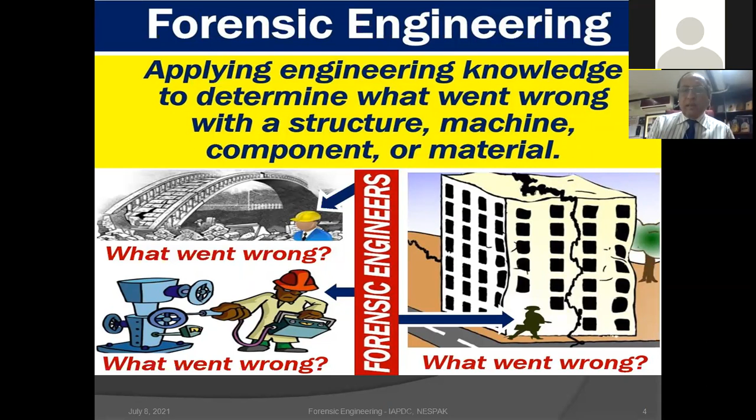Now you see in this figure, different kinds of works or structures. They could be civil, mechanical, or any other engineering - a material, a machine, or a component of any type. Forensic engineering is the activity to find out what went wrong and how did it go wrong. Sometimes what to do to make it correct is also included in the scope of forensic engineering in some cases, but generally it is an investigative process, the reverse process.

Here you see collapse of a structure. So the study of damaged structures or damaged works - but the study will involve many engineering principles, like even sophisticated modeling or some analysis or calculations. They will be a part of this. It's not only the engineering analysis which will be done to investigate failure, but also the inspection of site, the conditions of the site.

The collection of evidences at the site, in addition to the analysis which will be done in the end. Maybe some investigative studies, some laboratory testing would be needed, and ultimately the results are compiled in the form of a report called an evaluation report, which may be submitted to the court of law.

So in terms of its etymology, as per dictionary, forensic means the use of science and technology in the investigation and establishment of facts or evidences in a court of law. These are the clear-cut meanings of the word forensic. It is derived from a Latin term forensis, meaning public.

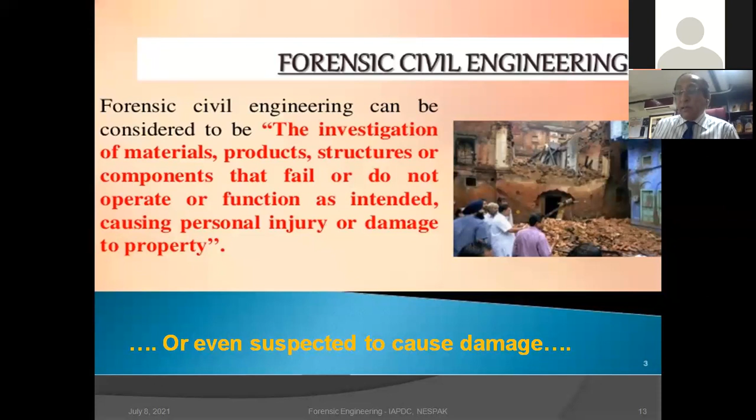Here, the investigation of materials, products, structures, components, machinery, all types of failures which are not performing their purpose. Either they have failed in totality or their intended purpose is not being fulfilled. They will fall in the domain of forensic engineering. Even suspected cases in which some doubt is there that the performance may be affected, there could be something flawed in the design or in the construction. So if some forensic study has to be carried out, sometimes referred to as forensic audit, that will also be a part of forensic engineering.

Now let's have the broad definition of forensic engineering, that we are dealing with damaged or deteriorated works. It is different from design, in which we start designing and planning and then ultimately end up in a design. Here, a structure which has been designed and constructed, it's the reverse way, in which we have to go to site to make inspection, to make observations, to maybe make some measurements, to collect evidences, to talk to people who have seen it happening, and then probably carry out some engineering testing, maybe some field testing, maybe some laboratory testing as per requirement, to find out ultimately the reasons for the damage or deterioration, how it happened, why it happened, whatever has happened.

So it is like a detective. In many cases, the forensic engineer is hired also as an expert witness by many organizations, by many clients, so that they can, in their technical language, present the matter in the court of law.

Here, I would like to explain a few terms which are required for clarity in this area of work. One is the accident: it is a hazard that exists, but the person or people are not aware that it is there. So that all of a sudden may happen, so that becomes an accident about which there is no awareness, but there is a hidden danger present, about which the people have closed their eyes probably. Whereas on the other hand, the failure is an explicit indication of whatever wrong has happened. And this is sometimes called an unacceptable difference between what we designed and what we observed, between what was expected and what actually the performance is.

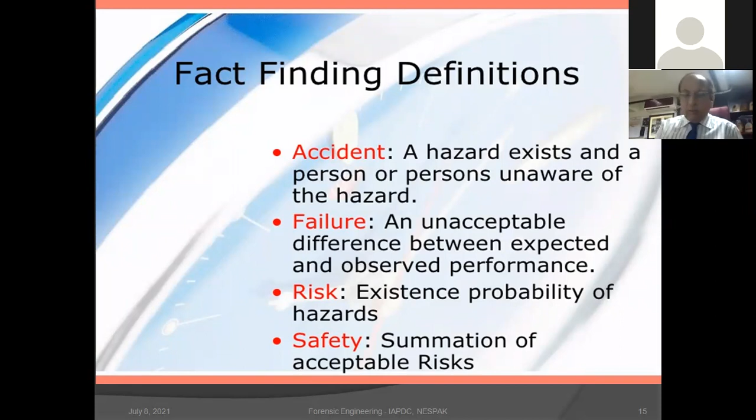The term risk is taken to mean the probability of the occurrence of such failures or hazards. Safety is the overall summation of the acceptable risks which we can accept. So we call that safety. So this is how it is taken.

I think whatever I'm telling will induce some passion in you to go for some supplementary reading, because some terms will be new for you, some terms will be common, but will be presented to you in a way that you will need to brush up your concepts once again.

Is this going to provide a solution to failure? Failures are complex. They are said to be complex. People think, even engineers would think, that there are clear, simple, obvious answers, a small brief answer. But quite often experience tells that it may be incomplete or incorrect, simply because failures are complex. It may not be just one small reason. It is just an oversimplification of the reality.

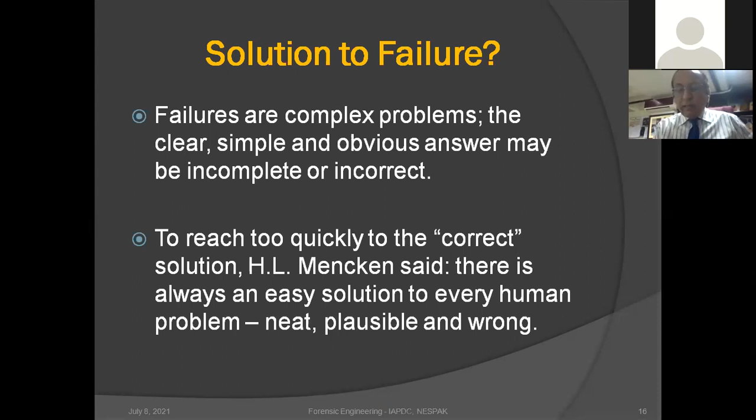H.L. Mencken said that to reach too quickly to the correct solution, there is always an easy solution to every human problem, which looks neat, understandable and plausible, but which is wrong. So the caution given here is that failures are complex. Don't try to oversimplify them. They need rigorous investigation and study. What we think is correct very quickly, spending little effort, will probably be wrong. So quick decisions cannot be made in case of investigation of such failures. That is the basic lesson.

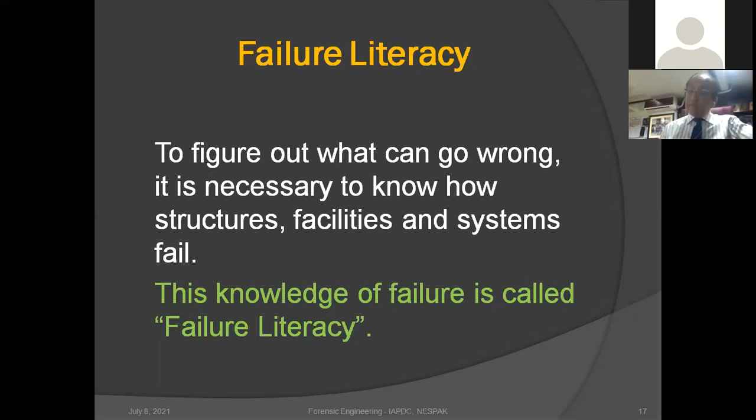From this concept has emerged a new concept of failure literacy, the knowledge of failure. Knowing what could go wrong is necessary, and knowing how structures, facilities and systems fail is taught by experience. If we know how they fail, we can figure out what can go wrong. This kind of understanding is literacy about failure.

The forensic engineer in general is basically a qualified engineer. It is a discipline of engineering in civil, electrical, mechanical, petroleum, gas or any other discipline, with a lot of experience of having dealt with matters of failure and having dealt with failures taken to the jury, to the legal profession.

Now let's have a look at different perceptions of engineering design versus failure. Engineering design is an attempt to prevent failure of the system which is designed. Of course, we design to make it failure proof. We don't want it to fail. So most of the time this attempt is successful. The systems don't fail. But at other times, it is not successful.

It could be a human mistake, a mistake of the system, or sometimes a cause of nature which has to be proven, because our engineering designs are also sometimes based on the principles of probability and statistics. If certain fixed threshold values, like for earthquake or flood in terms of return period, are exceeded, the design may be regarded as correct as per code, but it has to be proven. There are elements of nature which make it fail.

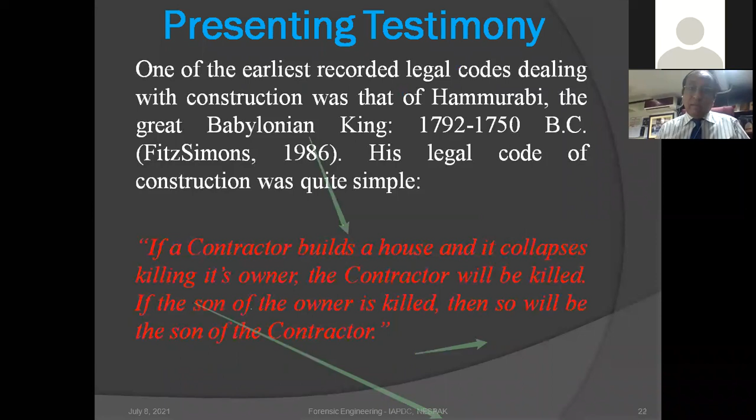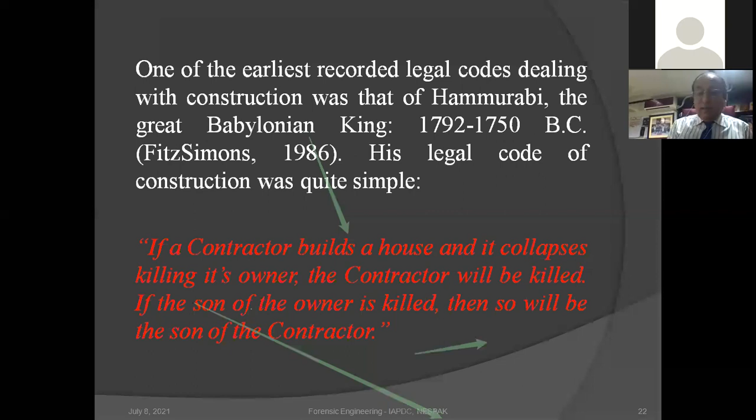I would like to share one of the earliest recorded legal codes dealing with failures in construction, that of Hammurabi, the great Babylonian king of the 17th-18th century before Christ. It is quoted by FitzSimons in 1986. His legal code was very funny and quite simple. The code was: if a contractor builds a house and it collapses, killing its owner, then the contractor will be killed. And if the son of the owner is killed, then so will be the son of the contractor. So you see, it was a very harsh code, 18th century before Christ, but people understood it at that point of time.

Very interesting to quote here, the Napoleonic Code of 1804, beginning of the 19th century. If a structure had a loss of serviceability within 10 years of its completion due to poor workmanship, it has to be proven in the court of law, or due to foundation failure, then the builder will be sent to prison, simply put behind bars. Today things are different. We have FIDIC, we have codes of the Pakistan Engineering Council to put penalty on the consultant, on the contractor, on the design work, on the construction work, separately.

Now let's talk of our situation in NESPAK engineers. We have seen that there is a sudden rise in the past few years of presenting our projects in one way or another to different legal forums, which include the Public Accounts Committee, different calls by the Anti-Corruption Establishment (ACE), calls from NAB, the National Accountability Bureau, from the Federal Investigation Agency, and some other legal forums. This means that our engineers, who are just engineers in technical terms and not trained at all in legal terms, don't understand any legal terminology or language. They have to develop some understanding of forensic matters, of legal matters, of the interplay of engineering and legal terms, so that when they're there, they have some understanding and the inhibition is reduced to a great degree.

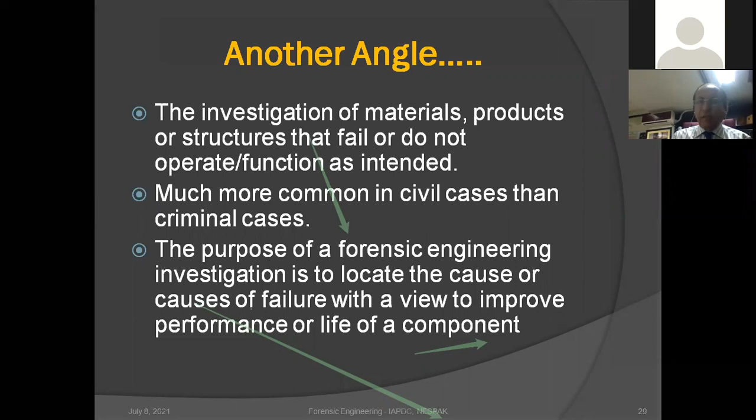The purpose of a forensic engineering investigation is to find out the causes of failure or distress with a view to improve the performance or life of a component. Whatever happened has happened; now the further improvement or livability, its performance, has to be improved so that the facility can be used with low risk and high confidence.

Where are forensic engineers used, in which circumstances? Most engineering disasters, any type of collapse that takes place, or design anomalies, are subject to forensic investigation by engineers. Then cases like train derailments, aircraft crashes, or automobile accidents which challenge their basic design and history, involving the design of the automobile, are also investigated by forensic engineers.

Many types of consumer products, medical devices, structures, materials, tools, and machinery used by different professions, if they malfunction resulting in loss or damage, are also subject to forensic engineering. This is sometimes called forensic audit of engineering products and systems. In addition, insurance companies use forensic engineers to prove liability or non-liability.

So the role of the forensic engineer becomes important. He is a really experienced engineer who has not only gained expertise in design but also in the failure of the system. He has seen and evaluated failed systems. That is what makes a good forensic engineer.

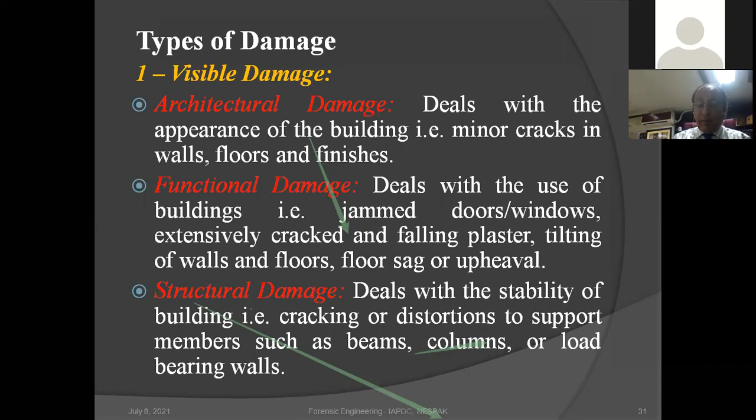A third and most acute category of visible damage is structural damage, in which some part of the structure has actually collapsed or developed very serious cracking, tilting, distortions, or movements of beams, columns, etc., making it dangerous from a structural strength and stability point of view. So these are the three visible damages a forensic engineer will come across.

Then there could be some hidden or latent damages related to hidden weakness. For example, reinforcement steel may get rusted but may not be visible to the naked eye, or there could be an alkali-silica reaction within concrete that may not be very apparent in the beginning. These effects pertain to hidden weakness kind of damages.

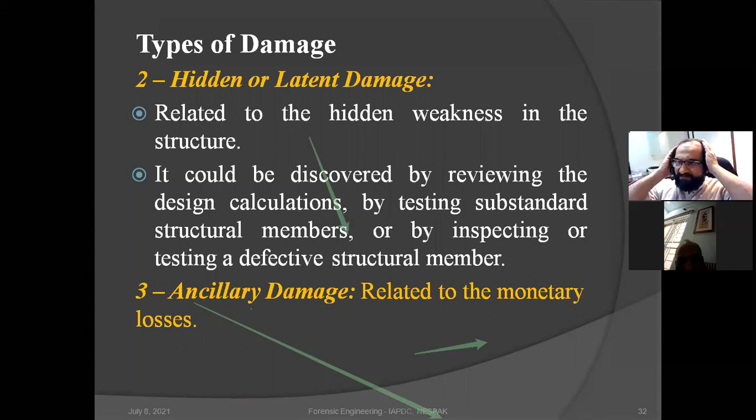Or it could be that a facility is designed for a certain level of load, and the design was appropriate or inappropriate—somehow less reinforcement steel and less thickness of the concrete member has been used. So there is hidden weakness present in the system even in that case. It can be discovered by reviewing the design, rerunning the calculation check, or using some testing method.

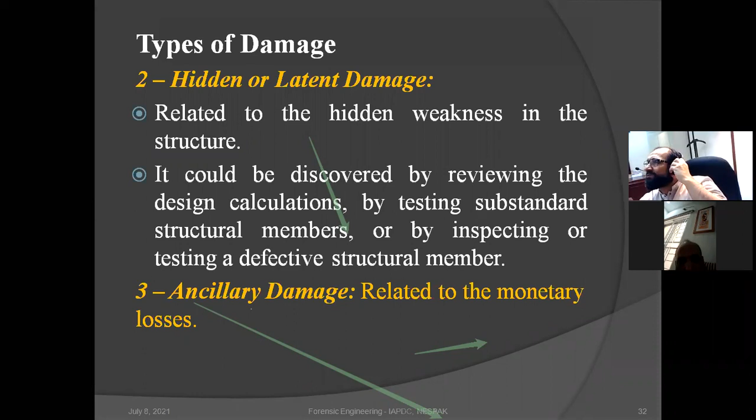A third kind of damage recognized in this area of forensic matters relates to monetary losses, or ancillary damage and financial losses.

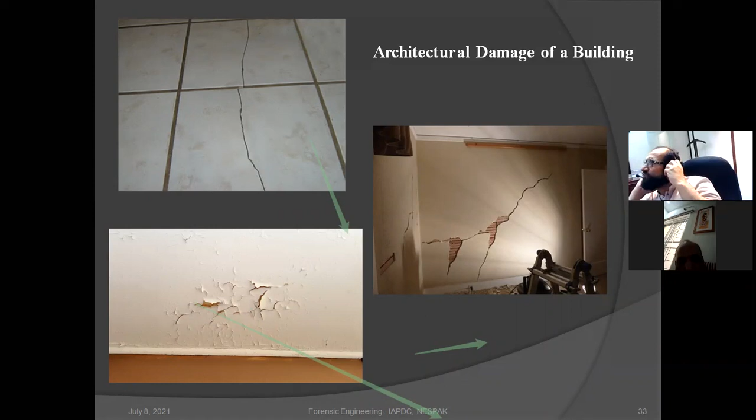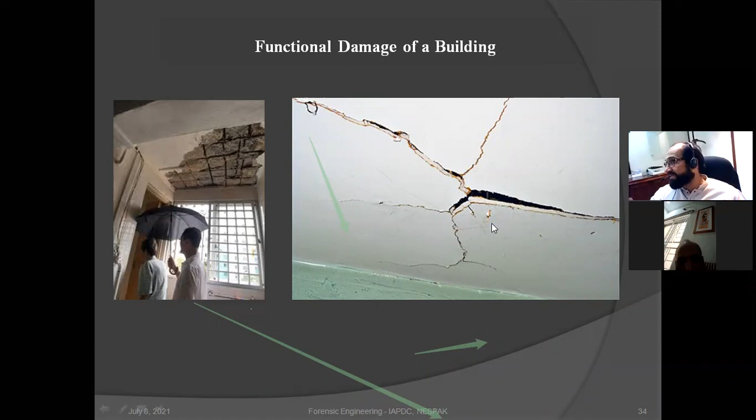In this slide, you see a view of architectural damage—damage is there, but we regard it as less important. Here you see functional damage: jamming of windows, some spoiling of the plaster from the roof, and on the right, cracking of the plaster on the wall. So the integrity of the building is still there and not hurt.

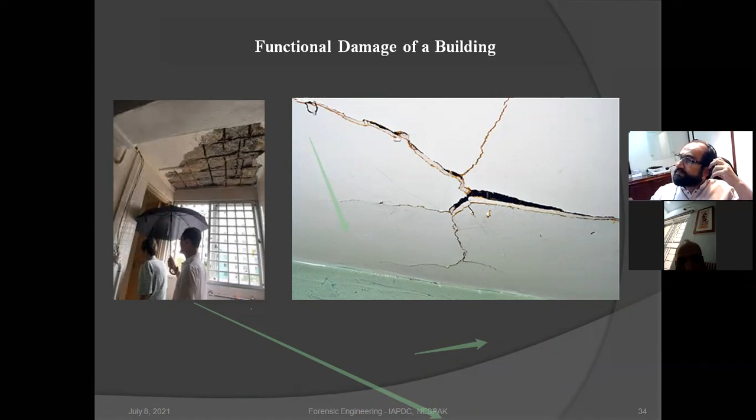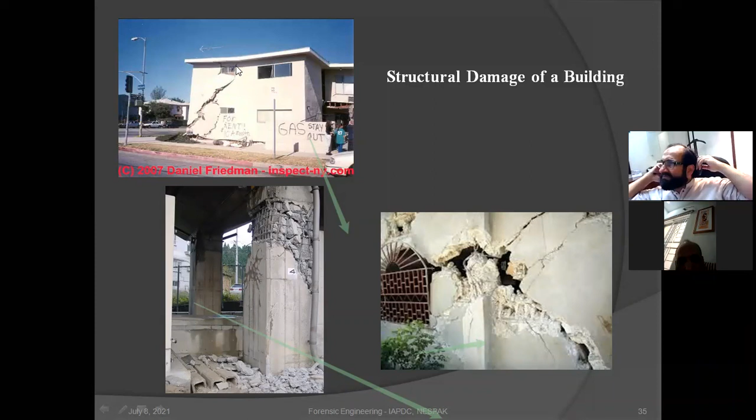Here you can see serious damages to the columns and to the RC wall system. Here you see excessive differential settlement resulting in this kind of cracking. Apparently this part of the building has settled, and you can see from the top that there's a kind of sagging pattern.

A forensic engineer, while looking at structures, has to be very vigilant and particular about the type of cracks, their shape, their orientation, and their location. That makes a very interesting study, and those cracks have to be mapped back properly. They have to be picked up.

Typical clients who would hire engineers to perform forensic investigations are insurance companies, as I said earlier, who would be independent claim adjusters who adjust the claims, and they in turn will be hired by insurance companies. The claim adjuster then may hire the forensic engineers, or sometimes directly the property owners. They may hire such engineers who have the ability to investigate failures, or the parties involved in a lawsuit in the court of law, the developers who develop building projects or area development work, and some government departments too. So this is generally how the client is for the forensic engineers.

Let's have a small discussion on the legal process. I will first give you a brief highlight of civil litigation. Let's start with the filing of a lawsuit. The one who files a suit is called a plaintiff or a complainant, the one who has made a complaint. The person against whom a complaint is made has to defend, so he is the defendant, or has to respond or reply, so he is the respondent. So they are the two opposite groups: the plaintiff versus defendant, or complainant versus respondent.

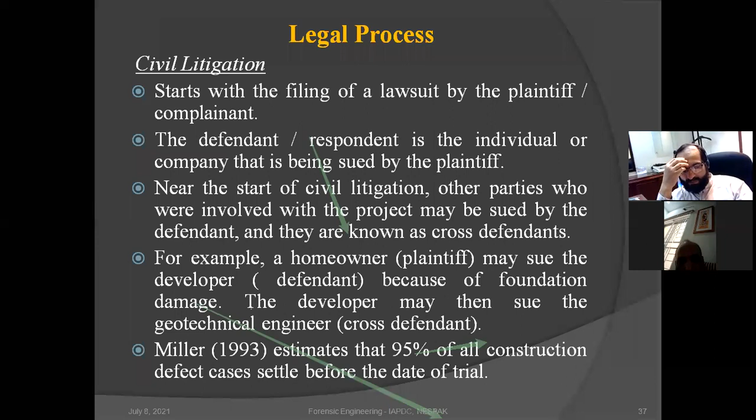Miller in 1993 gave a very interesting figure that about 95% of all construction defect cases settle before the date of the trial. This is very good, that most people try to avoid the long, lengthy procedures of the court, and even if the case has gone to court, they will try to settle it out of court. This happened in a big majority, 95%. Very encouraging.

Now let's look at some legal terms, like attorney-client privilege. It protects all documents concerning communication, including emails, text messages, letters, etc., made by the client or issued to the client. That's a privilege, so they may not be given to the other party.

Similarly, attorney work product is the written or oral material prepared by the attorney, or for the lawyer. There is a privilege for that too, that it may not be made public or given to the other party.

Statute of limitation is a law that sets the maximum time that the two parties in conflict have to initiate legal proceedings from the date of the alleged offense. So that sets the time - after occurrence of that, you have to settle it, you have to do it, within this much time.

Standard of care in negligence is another term - the level of care that a reasonably skilled person will exercise. That is made a standard, and if it is not done accordingly, then it is regarded as negligence.

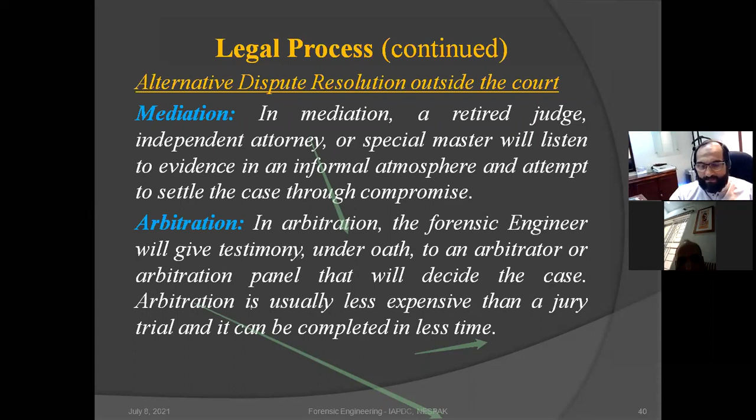Second is arbitration. As per the contract document of the project, the arbitration procedure is also mentioned there. In arbitration, a forensic engineer will give testimony under oath to an arbitrator or arbitration panel that will decide the case. It is less expensive than a jury trial in court, and it saves time. So these are the alternative procedures.

Further in the legal process are the protocols during the trial. This is documented, in our country as well as other countries, that in legal proceedings one has to keep these things in mind: present a positive attitude and proper demeanor as a forensic engineer, show proper respect to the court, and address the judge as 'Your Honor.'

Do not be boastful or over-exaggerate your professional qualifications - they would be meaningless. Remain calm and composed in a comfortable way, so that your body language speaks of your patience. Sit up straight in the witness stand and avoid excessive hand or head gestures.

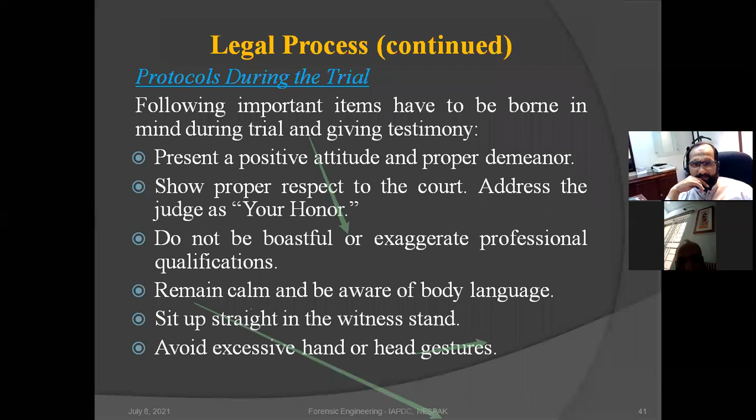These are taken to be good skills while handling a case in the court of law as an engineer: look directly at the jury when answering questions, don't look at the ceiling or at the floor - that is said to be a better way to have eye-to-eye contact. Don't give any facial expression that conveys your feelings. Speak concisely to the point, reply only to the question asked, and don't tell long stories.

Don't give pauses when you talk, because it gives opportunity to the other attorneys to start. Maintain composure during verbal attacks - remain calm and peaceful. Confrontation should be avoided with the opposing attorneys in the court, because that means the expert's credibility could be damaged and lost.

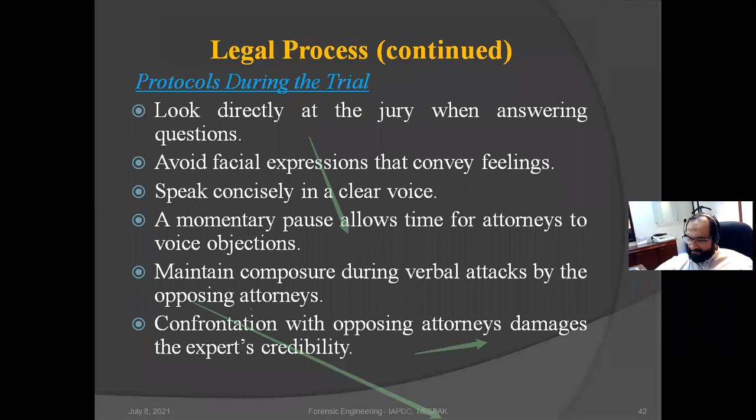Right, so any questions on my lecture till now? Anybody? Yes, for trainees - Mr. Farhan, is there some question by someone? Not yet, sir, I don't see it yet. Okay, there's an 8 second delay, sir. Okay, a hand is raised.

I feel that the participants are finding it interesting. It is slightly different from the main routine lecture in which people talk about theta, beta, engineering figures, diagrams, formulae and technical jargon all the time. But this is something we also confront and come across in our work, so believe me, we must develop some understanding of this area too.

Assignment and investigation - there are two important things: the assignment which has to be accepted or which is being worked upon. So a list of preliminary information would be needed.

Sir, we've received a question - someone has asked how important an LLB degree is for engineers. Well, it is not that important. It is your passion if you want to do LLB, because even forensic engineering doesn't mean you become a lawyer - a forensic engineer is not a lawyer, that is entirely different education. But if you want to practice in law also, properly and deeply into contractual matters, that may help you further. Generally engineers don't need a law degree, but if it is your passion, you can do it.

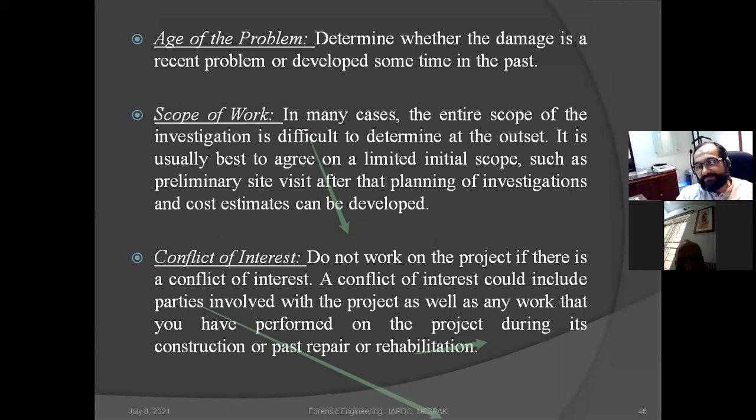But one thing is important: while doing this work, there should not be any conflict of interest. Don't work on a project if there is a conflict of interest. It could include the parties involved in the project as well as any work that you have performed on the project during its construction or past repair or rehabilitation. Even that would be regarded as a kind of conflict of interest.

So, having known about the project or the assignment, accepting it - look at this checklist. Be certain there are no conflicts of interest with any of the parties connected with the lawsuit, directly or indirectly.

Obtain as much background information on the disaster or failure as possible, because that will lead to the correct solution and to the correct conclusions. Attempt to separate facts from opinion - there is a difference between the two. Opinion may be hearsay, any person saying something without concrete evidence, just on the basis of what he has heard some other person saying, something not founded on correct foundations. So facts are different; fact is strong and opinion is not strong.

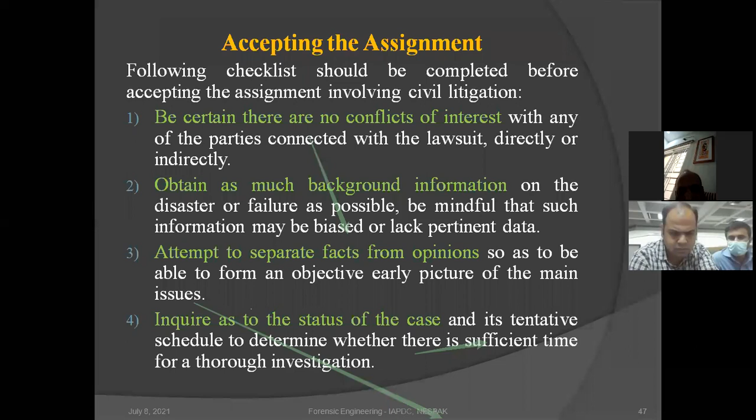So inquire as to the status of the case and its tentative schedule, to determine whether there is sufficient time for you to accept the work or not. If you feel that this task has to be done in 4 months, and your client wants you to do it in 1 month, it should not be done, because then many important things will be left behind and that will ignore so many things. You will have to avoid collection of evidence and carrying out analysis, and the conclusions may be wrong. It means a very serious thing: wrong conclusions may be made, and everything presented in the court of law may be incorrect.

Sir, we've received a question. Hello, can you speak a bit louder? Yes, sir, hello. How can PEC, Pakistan Engineering Council, play a role in forensic engineering?

An inquiry tribunal should be constituted by PEC. Not only PEC - the very contract document of important projects indicates the procedure for arbitration in case of conflict. PEC can do this, and sometimes in addition to PEC, even courts can establish and order the formation of such juries with specific persons, so that it will also be undisputed.

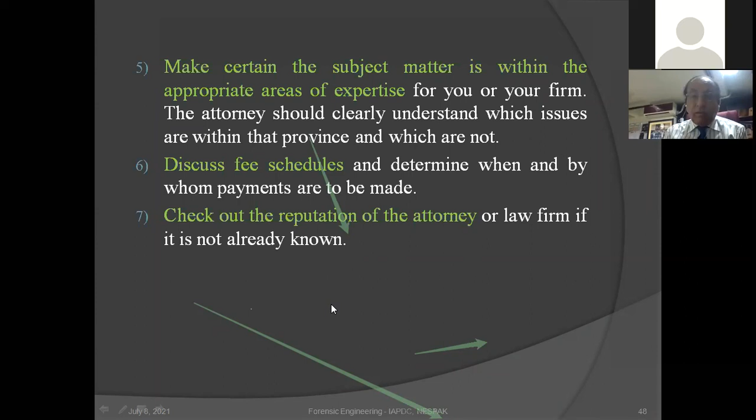Make certain the subject matter is within the appropriate areas of your expertise or of your organization. Of course, there is no shame in discussing the fees and settling the money matters, and check out the reputation of the attorney or law firm if it is not already known, if you are working for a law firm. So that was one part: accepting the assignment of the forensic investigation, or accepting such a project which involves forensic engineering.

What kind of investigations may be planned? First step would be to make a plan, to chalk out a plan that this is to be done. For the investigation of a minor problem, a minimum work plan should be there. For a large scale problem, the investigation should be exhaustive. So we have to keep in mind the magnitude of the actual work vis-a-vis the planned investigation work. We have to look into the budget and scheduling considerations.

Selection of an interdisciplinary team which will be able to investigate properly with proper coherence, what kind of site observation and testing requirements should be laid down, what kind of document collection from other departments would be required to help conclude the matter, the analysis of data of every type - site inspection reports, site testing reports, laboratory testing reports, evaluation analysis reports, etc. - and development of failure hypothesis jointly on the basis of all this qualitative as well as quantitative information.

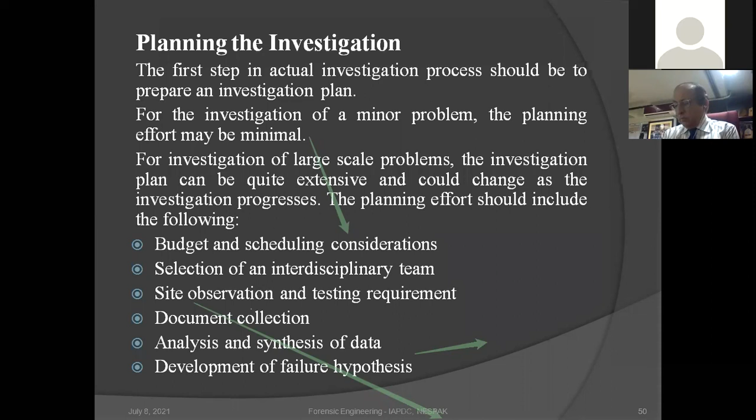So at the site of failure work, some site investigations which may be needed: maybe some initial site visit, that is very important, first inspection, followed by maybe some non-destructive testing like geophysical, acoustic, thermal, ultrasonic, or magnetic methods, both for ground and for the structure. Some destructive methods in which, in the ground, boreholes may be made, or if the structure is there, foundation or superstructure, some coring may be done or some testing may be carried out.

If the ground is to be tested, if there is a suspicion about the weakness of the ground, there are many types of in-situ tests for the ground. If the structure's weakness is suspected, many tests are there. In addition to tests on the core, one can even subject a selected part of the structure to a full-scale loading test to find out the movements, the strains. Similarly, laboratory tests on soil, water samples, foundation samples, or superstructure samples. So you see, it is an extensive exercise.

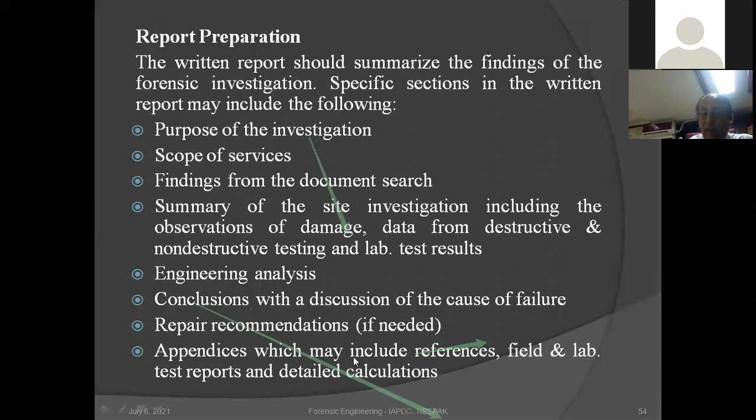And on the basis of the results of those analyses and other observations, conclusions with a discussion of the cause of failure. This type of document will be a very rich document, a good lesson for other engineers to learn from, and if required, some repair recommendations if included in the scope of work. Appendices may include references in detail of all the work done. So here I will give some commentary on forensic, geotechnical and foundation investigation.

In structures particularly, settlement is one big issue which gives rise to cracking, settlement, sagging, and loss of performance to some extent. Settlement could normally be vertical settlement as we understand it, or it could be lateral movement. Lateral movement is more prominent when we construct buildings on slopes. So any building constructed on a slope that has undergone damage or distress may have lateral movement too, in addition to vertical movement.

This settlement, its value and its reasons, is important to know because it will be considered to have caused failure if it exceeds the value fixed in the design. For instance, a structure is designed to undergo a settlement of 50 millimeters at the foundation level, but in reality if the settlement is something like 70 or 80 millimeters, it is also a kind of failure because the expected or design value has been exceeded for some reason.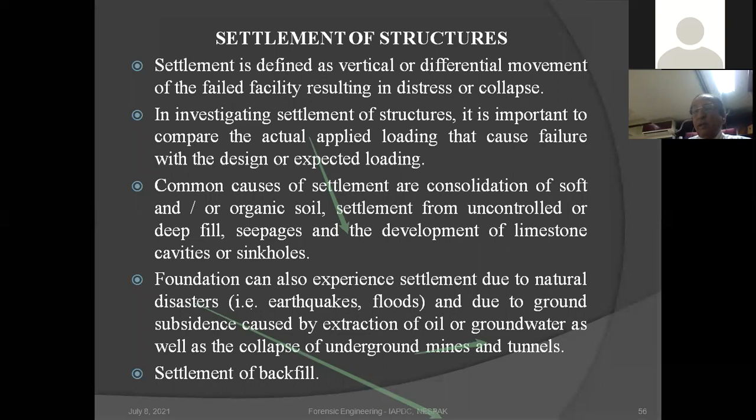Some people make the mistake of using the latest code to find the cause of an error, to determine what went wrong in the old structure. That should not be done. Also, if backfills are used but not compacted properly, or if backfill itself is a weak point, sometimes it is ignored by engineers, and that becomes serious. That also results in or causes settlement.

Many years back, around the 1950s and 60s, Skempton and MacDonald studied about 100 buildings, and they found that 40 had been damaged in various degrees, while the remaining 60 or so had no significant damage as a consequence of settlement.

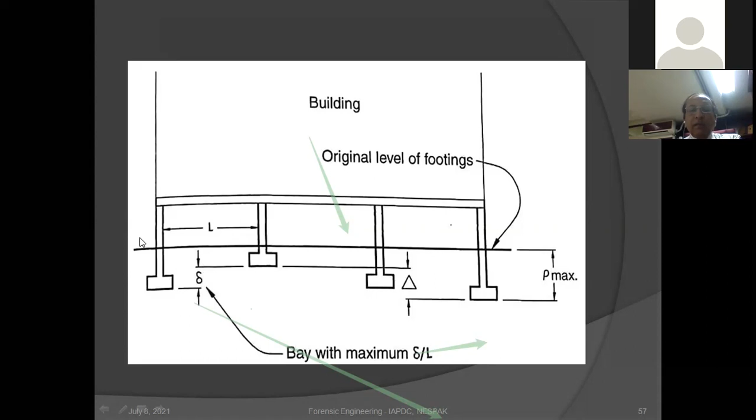What is angular distortion here? If the distance between two adjacent loaded points is L, and the difference in settlement of the two adjacent loaded points is delta, then this differential settlement divided by the distance between them, delta over L, is called the angular distortion.

So when this value, delta over L, exceeds 1 over 300, that is an indication of structural distress or structural damage.

So it is simple, by a forensic method, to establish the extent of settlement of the two adjacent loaded points, so that one can see whether they are within the limits of the code or not.

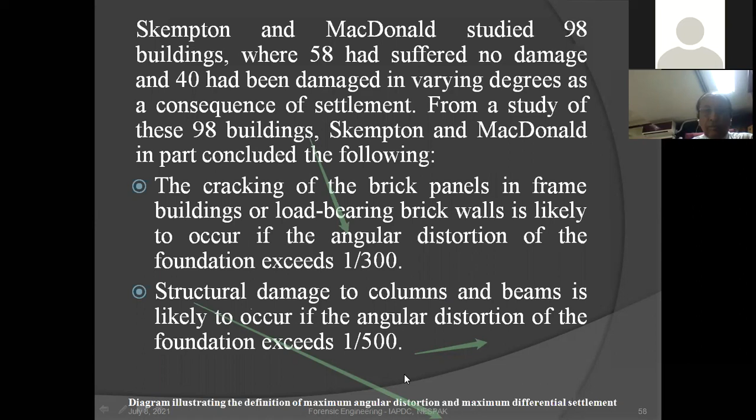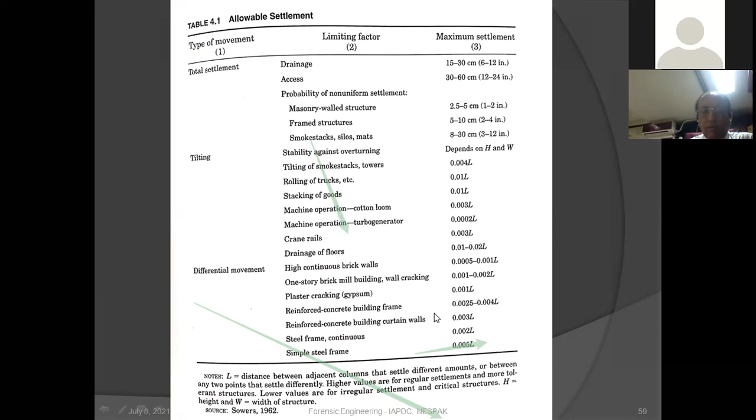Structural damage to columns and beams is likely to occur if the angular distortion of the foundation exceeds 1 over 500. So there are these two limits, and such values of total and differential movements are given here. Let's not go into this in more detail.

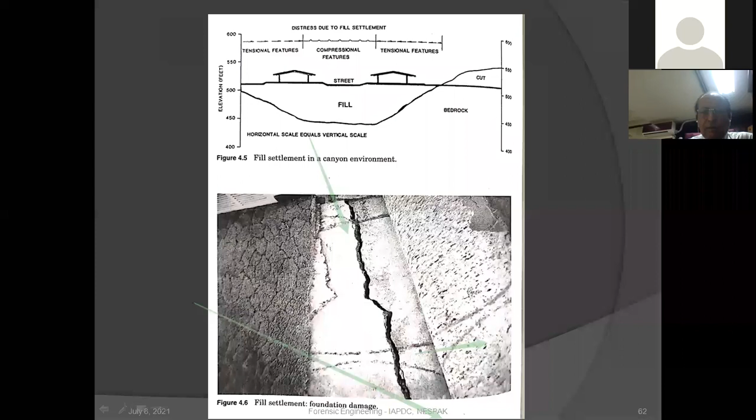I would like to show you a few figures depicting the kind of settlement that occurs in the field, which can be very, very serious.

In this kind of structure, a part of the structure is made on fill, this part, while the other part is on natural ground. That was a mistake. And if fill was used, it was not properly compacted, so there has been a case of more settlement here.

You see the floor, the natural ground is here, and here it has gone down. So the forensic engineer will have to find out if the fill was used, and if it was compacted properly. This difference in level will be a very clear indication of distress in this part of the building being pronounced.

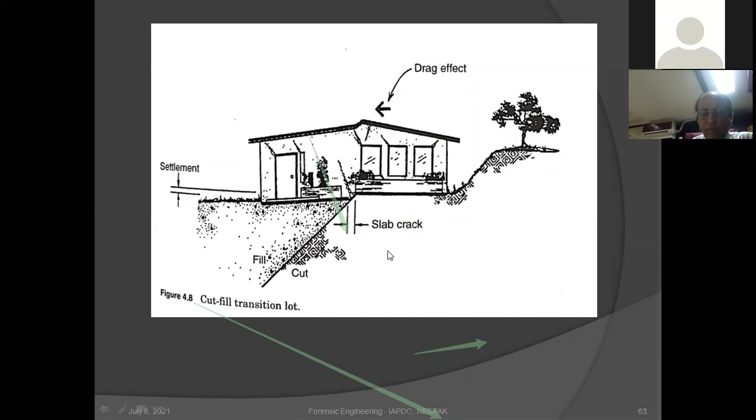So the forensic engineer may also be asked to determine possible negligence on the part of the design engineer. Of course, this could be part of the Terms of Reference.

Soil properties, on the other hand, and ground or construction standards can change with time. It is important for a forensic engineer to apply those standards or assess the soil properties that existed at the time of construction. This is the key point. It nullifies many conflicts and removes many hot points.

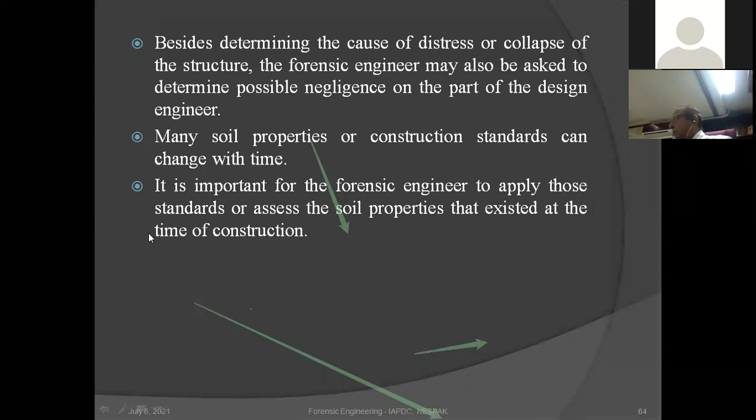The assessment has to be done in light of the state-of-the-art methods available at that time, the codes available at that time, and the ground condition present at that time. That becomes the reference, not the present.

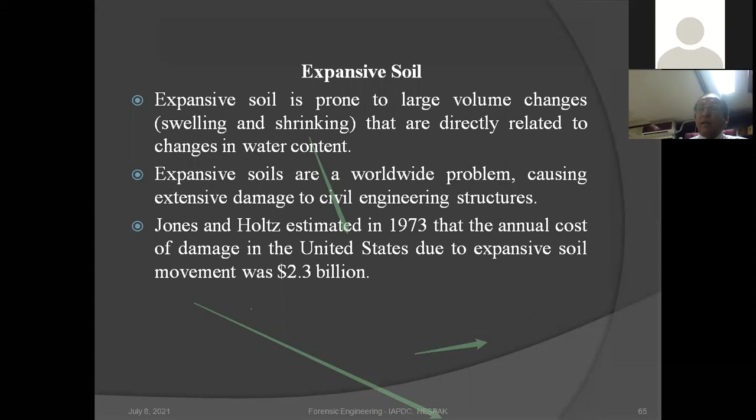So there are many kinds of ground conditions which give problems to structures, and the forensic engineer will have to look into the issues of the soil which expand upon addition of water. Conversely, when water is removed, they tend to contract. This expansive and contractive behavior is attributed to the same type of soil because of the special mineral arrangement and the presence of special minerals. They're normally clays having expansive minerals in which water gets into them and applies pressure with which the particles of the soil get apart.

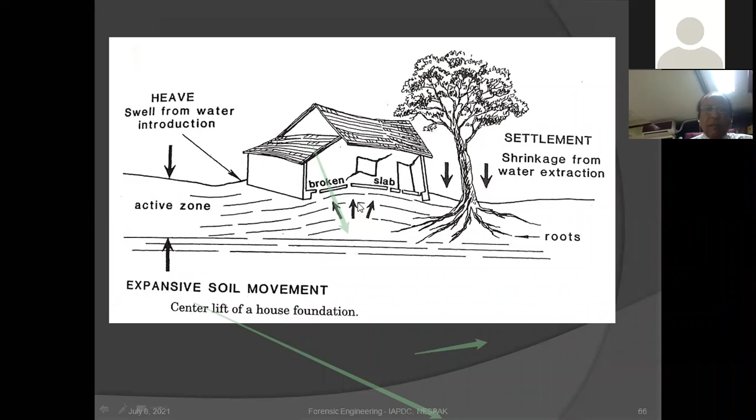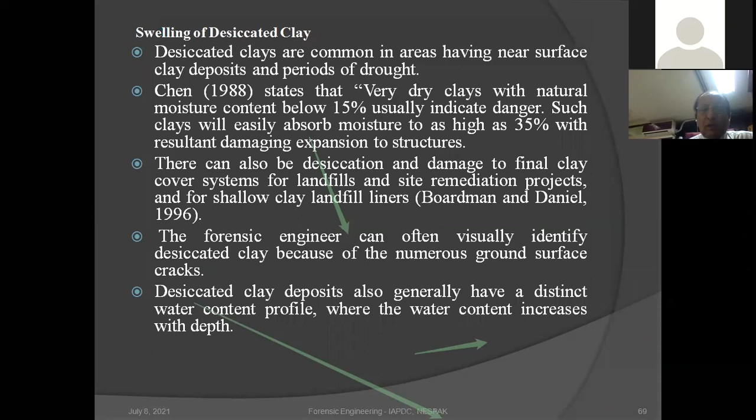Now let's talk a little about lateral movements. Many structures in engineering which develop cracking and movement undergo lateral movement in addition to vertical movement, and there could be a variety of causes. It could be seepages, lack of restraint at the back, or the pressure exerted by the backfill behind the retaining walls on one side, with lack of restraint on the other. So that causes lateral movement, or it could be structures present on a slope. If there is some slope movement, maybe slow or relatively fast, that is always going to result in some lateral movement too.

So that is a condition which requires a proper study with a keen eye - not only is vertical movement present in a conventional way, but also there is lateral movement, and there is an issue of slope instability or landsliding maybe. Because generally when we say slope instability, we refer to a smaller area of the slope, and when we call it a landslide, in our mind is a bigger area, a bigger part of the whole slope. So that makes it a landslide.

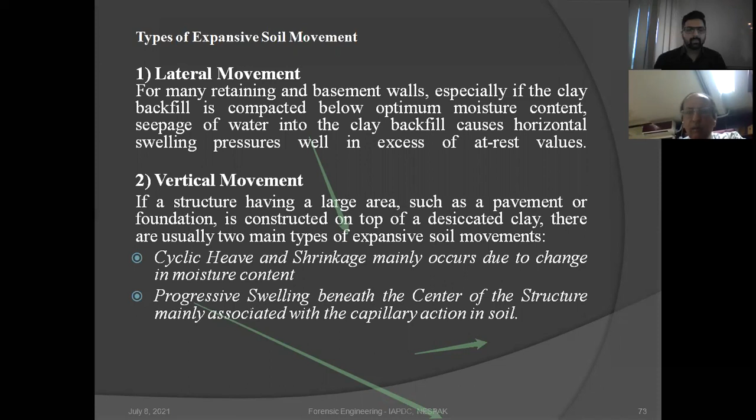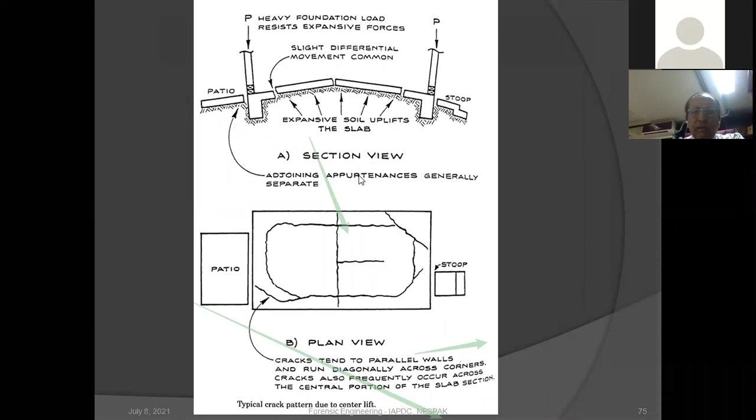So besides the construction of special foundations which will be able to resist expansive soil, some other treatments a forensic engineer, if required to recommend repair methodology for such soil, will be able to give. There are a host of treatment methods for such soil. One is that in the active zone, just remove the active zone of soil and replace it with non-swelling soil, remold and recompact it, or put a surcharge load to increase the height or elevation of the ground, and cause the swelling soil to get wet before construction. That is called pre-wetting, so that the major part of expansion expected will take place because of pre-wetting before the start of construction. This is a simple and reasonable technique adopted in many situations.

Or in some other cases, one can treat with lime, cement, salt, or fly ash by excavating the swelling soil and mixing with these in small percentages like 5, 6, 7%. Fly ash may be required at 10-15%, and then recompacting it. So its swelling attitude would be contained to a large degree.

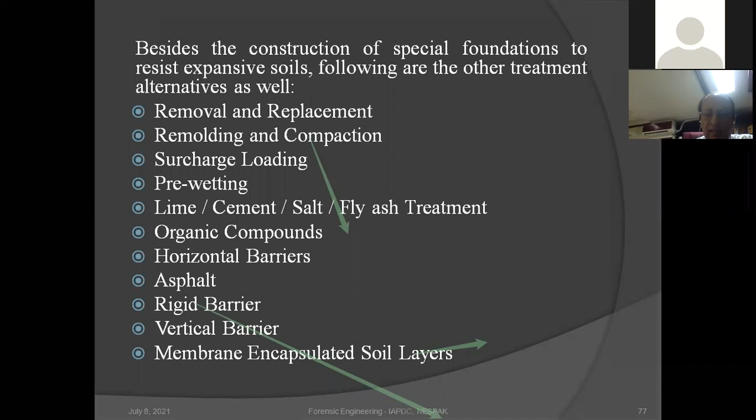Similarly, there are organic compounds and there are barriers, and you see things like this and that, which can control the movements in such soil.

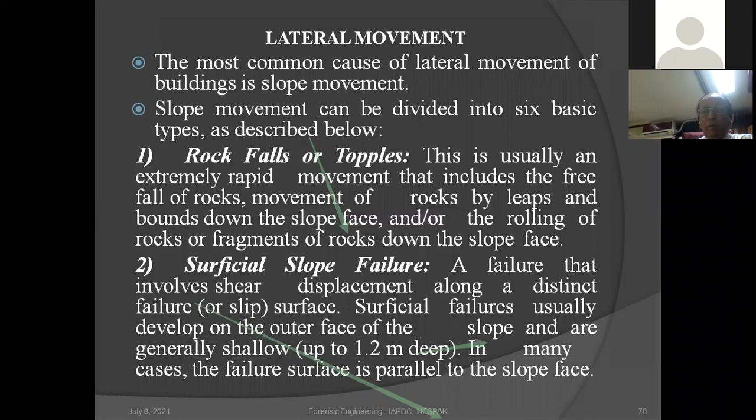Another kind of situation a forensic engineer will come across is lateral movement on slopes. Slope movement could be of several types. There are falls, rock falls, in which pieces of disintegrated rock fall under gravity straight, and others in which they turn and topple and then fall under gravity.

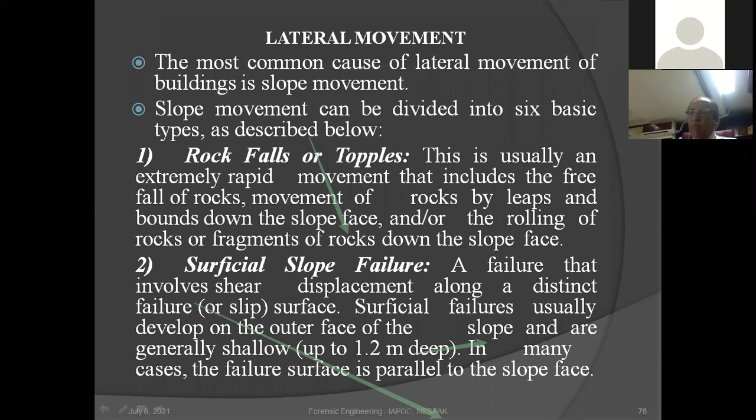There is also a kind of surficial slope failure, a shallow failure in which only the upper mass is involved, and which is generally taken care of by growing vegetation to control the surficial failure. But if a slope is subject to deep failure, gross slope failure, then vegetation doesn't work there.

So this also has to be seen by the forensic engineer in those situations. And landslide is a big movement, gross failure of not just one slope, could be a system of many slopes over a big area, like we observe landslides mainly on the Karakoram Highway in Pakistan.

So slides have been of other types when there is high moisture present in the soil. So they kind of flow. This is normally called debris flow, and the rate of movement is not that low. If the rate of movement is low and gradual, then that kind of movement in the slope is called creep.

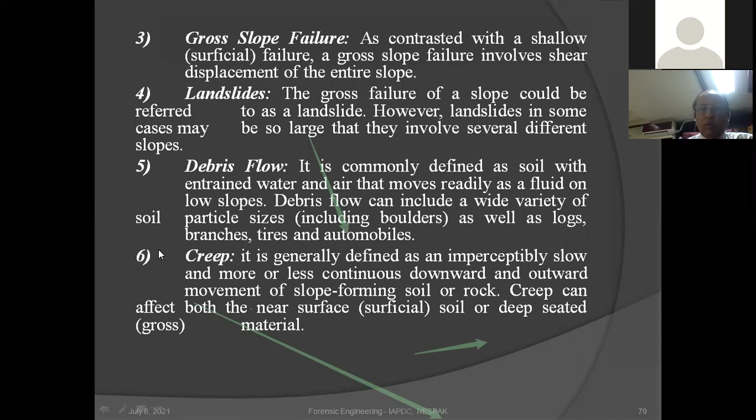This kind of effect is minimal on the structures, and a forensic engineer has to find out the right reasons for the movement, whether they were considered by the engineer at the design stage and whether measures were taken or not. That fixes a very big responsibility.

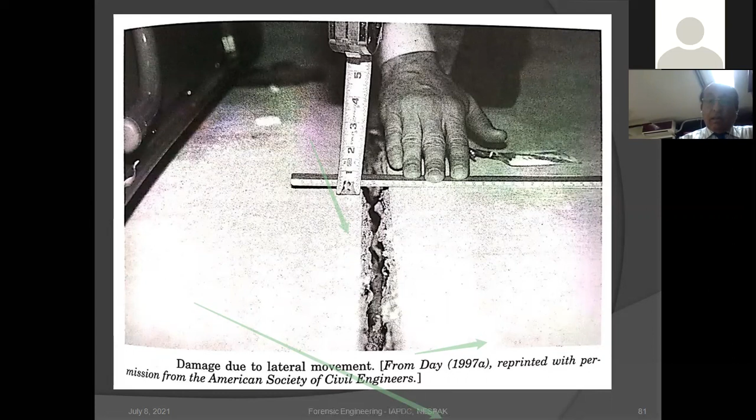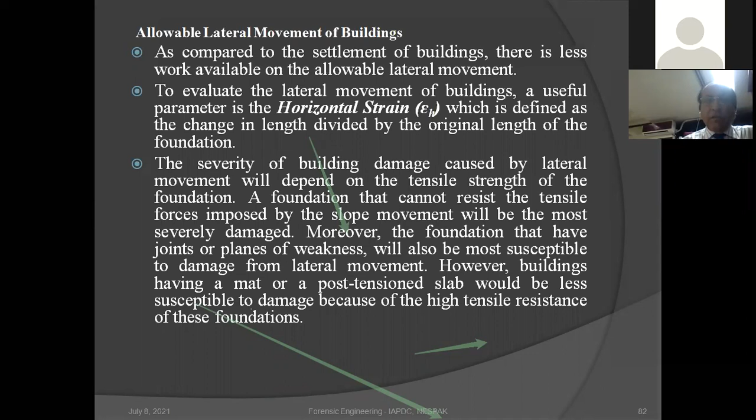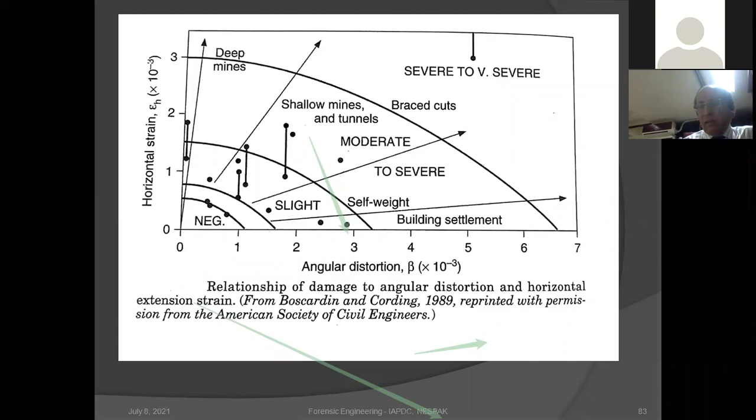There are other forces in addition to these which affect structures, like earthquakes, which is very common. The right way of doing design for earthquake engineering is to use, for ordinary works, the building code, and for special works, special geological methods to arrive at the peak ground acceleration through actual fault study.

If even then there are movements and damages in the structure in an earthquake area, a forensic engineer has to see whether those earthquakes exceeded the ones given in the code, and whether the procedure given in the code was adhered to, and even then this damage has taken place. That would clearly result in modification of the code.

So that would not tantamount to fixing liability on the parties or on the engineers who were involved in the design or construction stage.

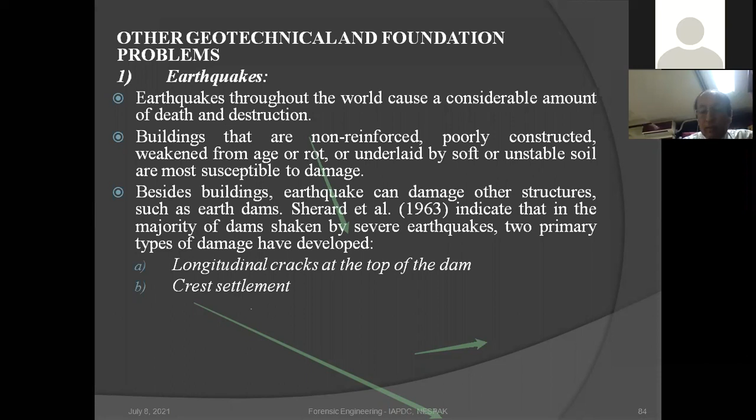Similarly, there are movements of embankment dams also, and there are other issues of the ground which have a relationship with earthquakes. So this has to be seen by the forensic engineer.

It becomes a complex thing, whether surface faulting was there, whether the ground got liquefied and lost its strength during the earthquake and the building tilted and collapsed, and what kind of movements were there in the slope.

The engineer may require instrumentation to record movement on the slope, as we have been doing in Murree quite often, because in Murree there is a tendency to build structures and facilities on the slope. Of course, where else can they build? Some areas are stable, others are not.

The stable areas have already been used for construction in places like Murree, and the less stable areas are now being used for construction. So quite often there are problems of movement, vertical and lateral. But there are ways and means to arrest them at the design stage too. Good design would arrest them at the design stage.

Are there some queries or questions at this stage?

Yes, sir, there's one question. What about silty A4 soil? How does it behave for soil replacement or backfilling?

Silty A4 soil is generally not a better option for backfilling. Of course, we can use it in a controlled condition, but for placing structures, if we have better soil which is non-cohesive, it will have less settlement potential than silty soil.

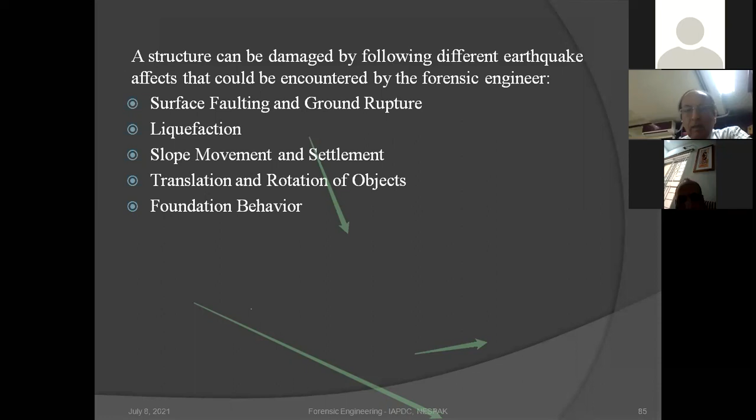In earthquake areas, if granular soils are present in a loose state with a high groundwater table, they will cause a very serious issue of liquefaction. So in earthquake areas, the structures which are built on granular soils, such granular soil should be present in a high state of compaction to remain safe during earthquakes.

Here I will quote a very famous example of the Hyatt Regency walkway collapse in Kansas City, USA. The lessons learned are important for us and for forensic engineers to see. They arrived at three main conclusions. Luth has reported three main lessons.

Number one: implications of failures, though rare, are far too serious for scope to be defined through a low bid process. One important thing pointed out in this case of failure, which could be the case of failure of many other civil engineering works too, is that after the design, the construction contractor is hired on the basis of the lowest bid. He clearly negated the requirement of low bid for good quality work, because the low cost bid will tend to save money, and the saved money sometimes goes into using unscrupulous practice in construction.

That's why for good projects there is more emphasis now paid to quality, and some good works are selected just on the basis of quality. First of all, one has to see whether the parties who are going to construct meet the quality requirement or not. They should all meet the quality requirement. Then one should select the bidder with the lowest cost.

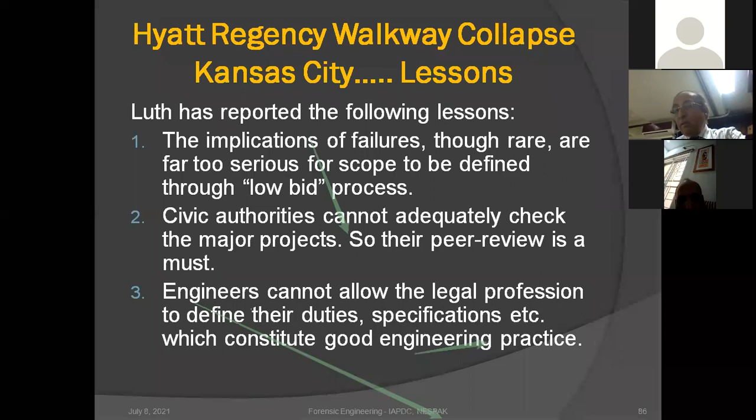So this is what they learned from the case of failure of the Hyatt Regency walkway. You can Google it and find out; this is a very interesting case of failure. I mentioned these three conclusions because they relate to us and to the whole profession of engineering, showing that some reforms are really needed in engineering matters. Next, we move to a collapse of a chimney case.

Here I would just like to emphasize that in the matter of forensic engineering, things go into investigative detail, and I tend to draw a line between a stable soil over which buildings stand perfectly and an unstable or liquefied soil.

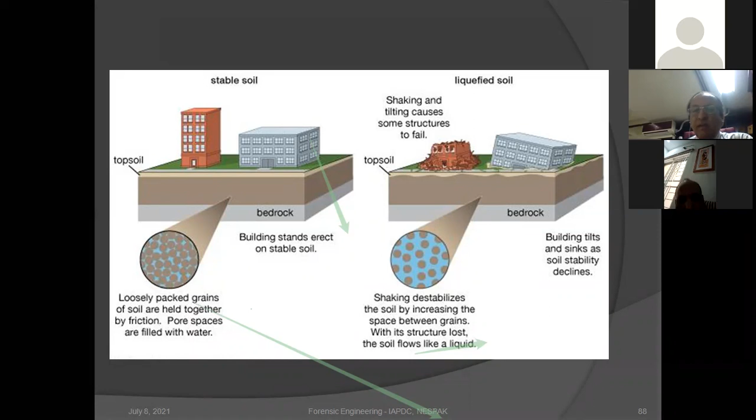Erosion is another thing you see, which has to be seen in civil engineering in particular. One has to see what is the main cause, whether it has been excessive runoff causing erosion close to the structure, or rivers and streams causing a lot of erosion, or coastal erosion, or chemical erosion because of chemicals flowing with the water, glacial erosion, and floods.

Erosion brought about by wind, by dislodging of soil particles by wind, or there has been mass movement itself. So here you see many types of erosion patterns in ground, and if structures are there, they're going to be affected.

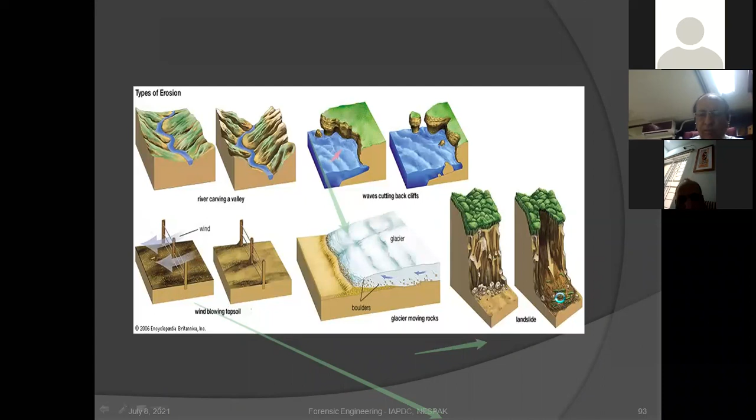You see river carving a valley as a general case, and waves cutting back cliffs, and wind blowing like dunes, shifting the sand from one place to the other, and glacial movement, and kinds of landslides. Here you can see a lot of material having slipped down. So that kind of movement is also broadly speaking under the realm of erosion.

So I just wanted to give you a very broad outlook of the scope of forensic engineering, with particular reference to geotechnical and foundation engineering, but applicable to all disciplines of engineering.

Now let's go back to discuss a little about design, what design is about. Design in engineering, whether civil, electrical, mechanical, or any other discipline, may be considered as an attempt to use sciences, mathematics, the latest technology, and other principles and softwares to prevent failures. The ultimate objective is that we use codes, guidelines, and mathematical principles so that failures should not take place. We also use a factor of safety according to the situation.

So this works well most of the time. But at other times, when it is not successful, it can then provide lessons for students and practitioners, whether that failure is because of the negligence of the engineers or by an act of nature. Even if sound practices were used, but the act of nature has been beyond the limits specified in the codes, it becomes a lesson for the engineers, practitioners, and students to learn from.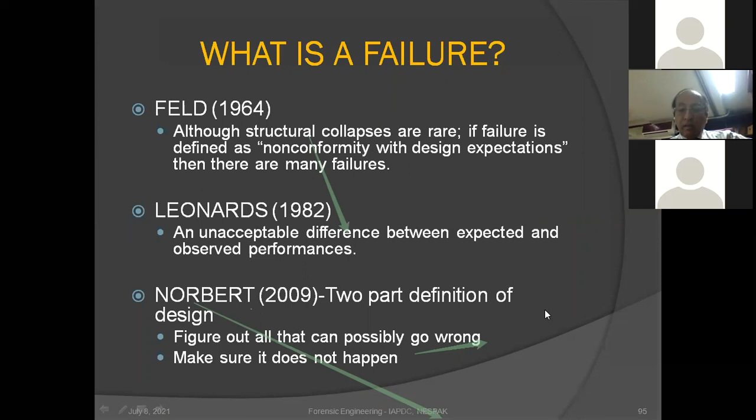So according to Luth in 2000, he gave a very interesting commentary on why fewer failures are taking place, because despite so many anomalies in engineering, he said that buildings are not automobiles and airplanes.

It is not possible to build and test prototypes to work out the bugs. We cannot test full structures in engineering. You see, like a bridge, a tall building, or a dam - they are not like small automobiles or even airplanes. We cannot test them. We can just have tests on the materials and small parts, and then apply the conclusion.

Nor is it possible to design and draw every detail on the drawings. We build from less than complete drawings. Normally this is there - we generally in engineering work, the designs are less than the complete drawing. Always there are certain things which are left.

Laborers have uncertain skills in addition. They are human beings, and the term we call workmanship, that is there. When there is a medium order or low workmanship, of course the quality suffers by the same laborers. So such a system in which we make our structures in civil engineering in particular is apt to produce more failure. So it should have produced more failures, but it is not producing more failures.

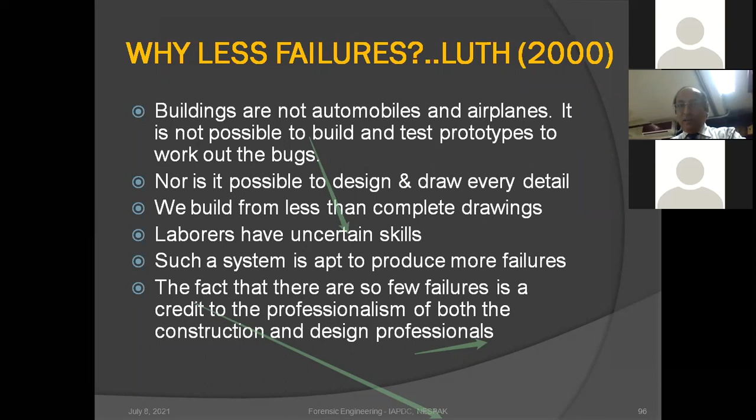In particular in civil engineering, we use fairly good safety factors, and in NESPAK, I also know my colleagues from NESPAK who are listening to me - they know that they use good safety factors, and Mr. Luth has given them credit that they are doing very good work.

So, broad types of failures. Look here: failure of people and companies, failure in planning, which is very important - if your planning fails, everything fails. Financial failures like bankruptcy - what kind of work will you be able to do if you have lost money?

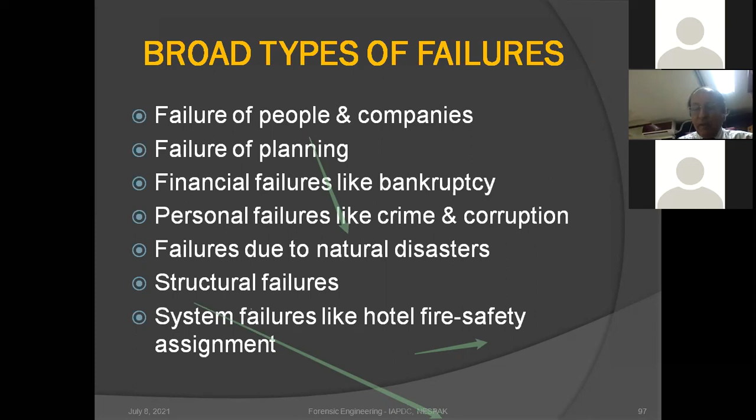Personal failure, like crime and corruption and loss of morality - we are human beings, engineers are also human beings. Failures due to natural disasters. The actual structural failures and system failures, like hotel fire safety assignment failures, etc. So these are the failures which have to be considered in forensic engineering.

Failures and mistakes - what are these? Are these inexperience? Look here, we learn and gain experience by making mistakes, don't we? We do, we gain experience. I, as a junior engineer, made more mistakes. Now I make fewer mistakes in those kinds of works which I do now. Once we become experienced, we are less likely to commit similar mistakes in similar kinds of work assignments.

So mistakes, however, continue to be made by those who are in the process of gaining experience. So no sane engineer can say that he never made any mistake. We make mistakes, we are human beings - that is how we are developing, and that is how engineering develops. We may again commit mistakes when confronted with something new in which we lack experience. So, in a way, there is a positive side of failures and mistakes that improves our experience. We gain from these failures with time.

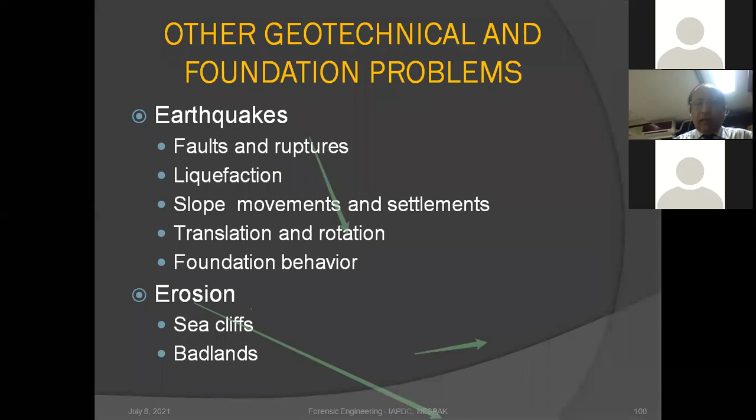I think I've already commented on the lateral movements and foundation problems. Well, I think we have discussed this to some extent. We should not overemphasize this.

In addition, there are problems of durability beyond the straightforward failure, which come from sulfate and chloride attacks in foundations in civil engineering, deterioration of pavements because of frost action in which heaving is there, alkali silica and alkali aggregate reaction where the material type is inappropriate, and dampness caused by moisture movement which could not be controlled. Plantation of too many trees around the structure will draw water from the ground, resulting in contraction and some kind of settlement, particularly in swelling soils.

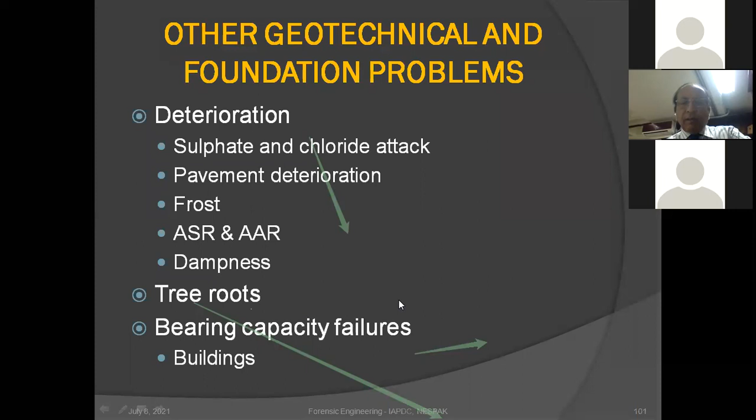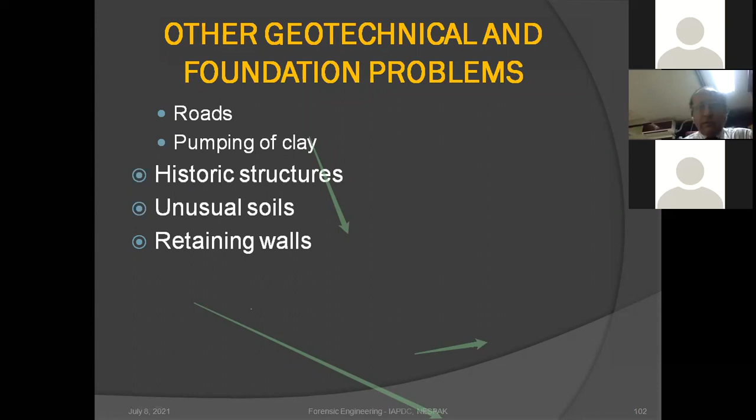There are bearing capacity failures of buildings, and pumping of clays in rigid pavements, and old structures have their own reasons. Archaeological and historical structures are unusual structures, and there are so many effects of groundwater movement. It's not only groundwater rise which can mar the structure and its foundation, but also the capillary rise, which is a gradual phenomenon.

And when I was a student in my MSc engineering, one of my professors once commented that you, as civil engineers, should know which is your enemy number one in your professional life.

So we just thought of so many things because when we think of enemy as human beings, we had a perception of enemy in the form of human beings. So he ultimately remarked that water is the number one enemy for civil engineering works.

He quoted that when he was a student, his professor at an American university gave him an assignment to write down all the defects and problems that can crop up in civil engineering works of different types because of water, because of any reason. He then compiled a long list. So water does a lot of harm to civil engineering works.

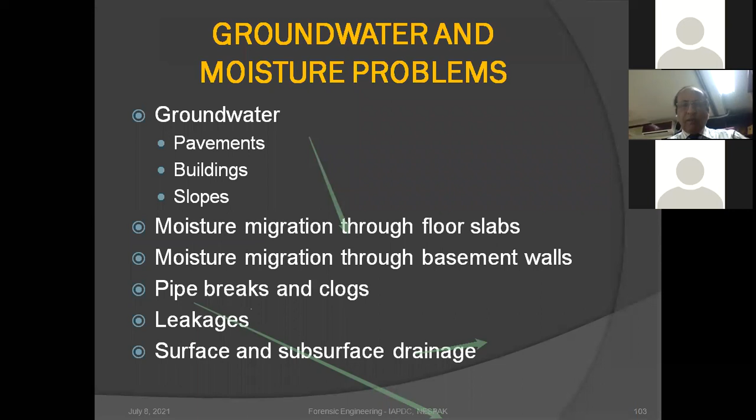Less water—with an apology to our water engineers, I don't know if some water engineers are attending here or not, but I'm talking of the harm being done to the civil structures by water. And in forensic engineering, the role of water has to be clearly understood properly.

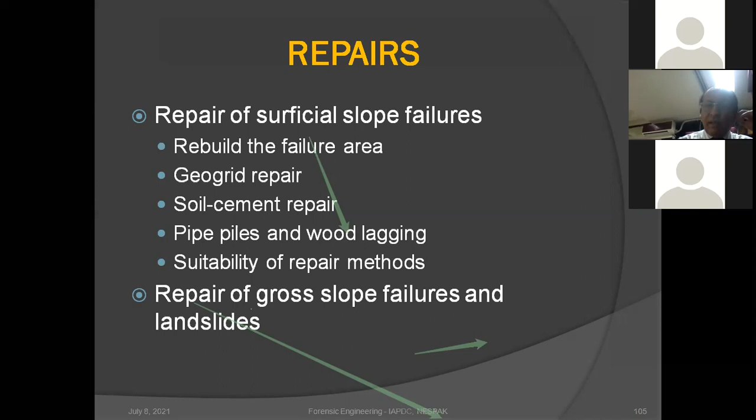In landsliding issues, water is culprit number one. In our northern part, in Murree, Kohala, and even in northern areas along the Karakoram Highway, and other areas, in most cases the culprit number one is water—the drainage of water, poor surface drainage and poor subsurface drainage. So repairing is another task which could be assigned: repairing of groundworks, earthworks, and foundations, reducing potential liability.

You see, let's have a little discussion.

Proper report preparation and file management. Files are managed properly and a proper report is prepared. Reports and proper documents are prepared, so things are in order. Then the possibility of such liabilities will reduce. There is a lot of engineering jargon, superlatives, and other technical words, so they should be avoided.

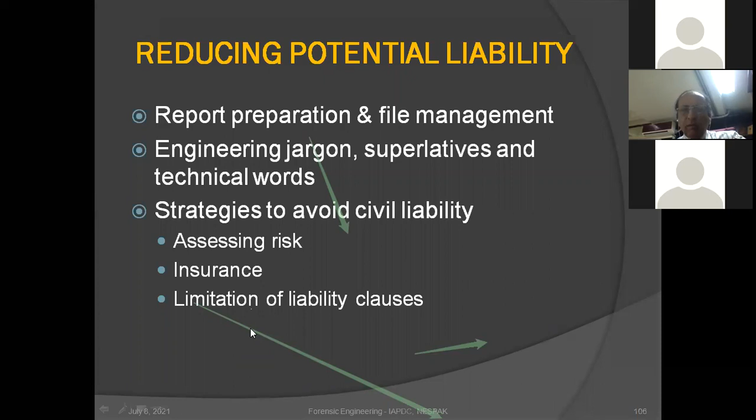There are strategies to avoid civil liability: if risks are assessed, insurance is carried out for the works, and there are clauses in the conditions of contract about limitation, about the maximum value of liability clauses. So contracts have to be made very properly and very carefully.

Well, if we have less experience and some mistake is made on the basis of less experience, then in legal terms they compare it with the best work done by a normal or expert engineer. That is what is called the standard of care—that a standard of care has not been exercised in the work, and a less experienced engineer, say on a tall building, a difficult complex structure, has been involved.

It has been designed by novice engineers, say grade 8 people who have less experience. Then very much likely they are going to make some mistakes or oversights. So if there is some failure, the court will not accept that this is because of the less knowledge and experience—they will say this is the standard of care which should have been exercised. So there is negligence in that, and a penalty will be fixed.